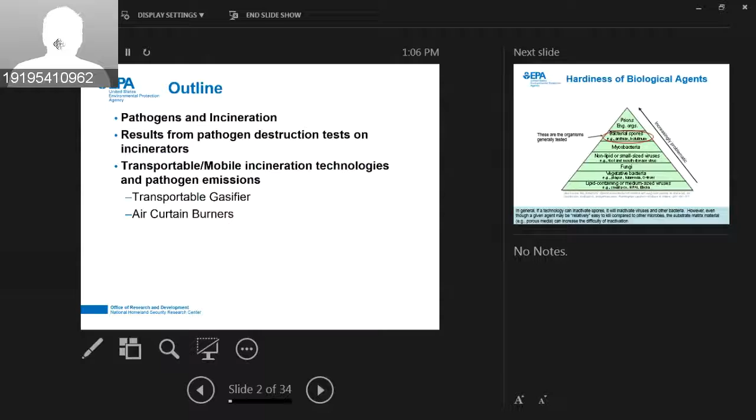All right, there we go. Does everybody see? Oh, actually, hold on a sec. All right. Does everybody see my screen now? I do not. I do. Don't? I do see it. Okay. You see it. Paul, you don't see it, though. I do not. Interesting. What do you see, Paul? Well, I'm trying to reconnect, see if that works. Sounds good. Okay, continue without camera. Okay, I see. Yeah, I see now PowerPoint with all the stuff on the side, and now I see the thing with multiple windows on it. Okay. So do you see just the single slide now, your title slide? Yes. Okay. All right. Good deal. All right. All yours, Paul, and just tell me when you want me to advance.

Okay. Well, I appreciate the opportunity to talk to everybody about this. I was asked to talk about issues related to emissions of pathogens from mobile and transportable incineration technologies. So you can go on the next slide. And so I'll talk a little bit about what we know about pathogens and incineration in general.

I'll talk about some of the testing that we've done at our research facilities looking at destruction of pathogens from incinerators. Talk about the various transportable or mobile incineration technologies that we have a little bit of experience with, and I'm sure there's a lot of other possibilities that you guys have probably had much more experience than me out in the field with. But we'll talk about the transportable gasifier and air curtain burners. And the issues that we see from these two sources are probably the same types of issues you're going to see from pretty much any other mobile thermal treatment type of technology. Next slide.

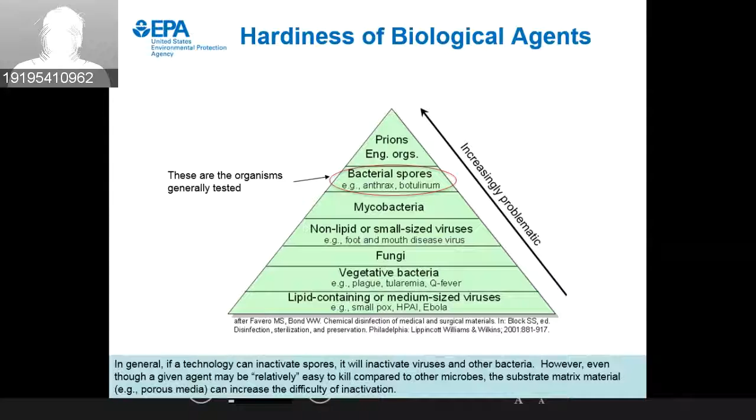So incineration essentially is high temperature combustion. Most of the fixed site incinerators and some of the transportable ones that you see will have a primary chamber and a secondary chamber. Usually the primary chamber is where the materials are fed into, and they may not operate at as high a temperature as the secondary chambers, but the primary chambers will effectively kill a lot of the microorganisms.

It'll release combustion products and particulate matter into the gas phase, and it generally generates the residual bottom ash that gets dumped out and recovered and brought to a landfill or some other type of disposal method. Then there's a secondary chamber, which is usually like a large box, and the gases pass through that.

Sometimes you have burners in there to apply additional heat, and they typically have to stay in the secondary chamber at a certain temperature, like 1,000 degrees C or 1,800 Fahrenheit, depending on how you look at it, for a couple seconds. And coming out of the secondary chamber, you'll have some fly ash.

You have acid gases. Sometimes you'll have organic material in the gas phase. Sometimes you'll have organic material bound onto the fly ash. Dioxins in particular are typically formed downstream of the secondary combustion chamber. So sometimes incinerators will have air pollution control devices to catch the particulate matter and acid gases and to prevent the formation of pollutants like dioxins and furans.

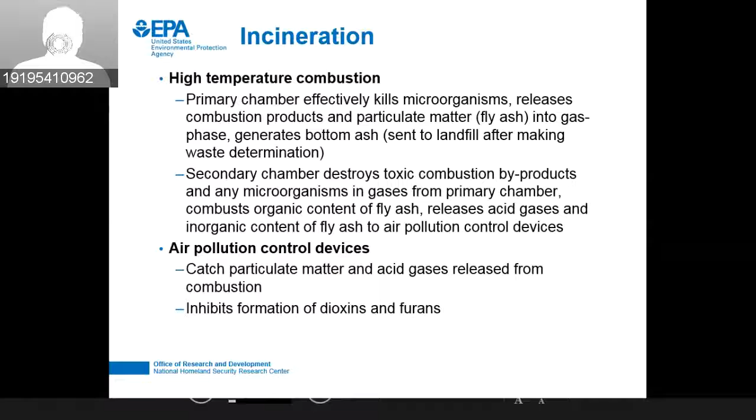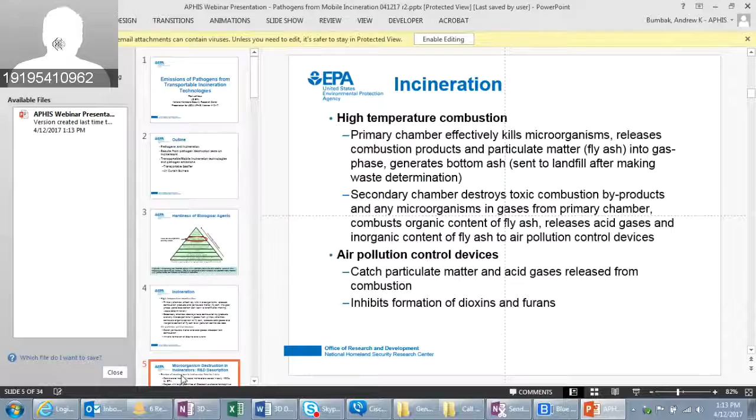I still just see the one slide. Oh, there we go. Oh, somebody's PowerPoint crashed. I hate it when that happens. Well, right. Sorry, I was muted. Are we on the right slide now? One before this, I think. Okay. Yeah, I think one more before that, maybe. Okay. No, you're right. It's the one after this. Sorry about that. Okay.

Well, there is not a lot of full-scale data out there on pathogens from incinerator systems, because in order to measure them coming out the back end and have it be so you're not just driven by your detection limits, you have to put a lot of your surrogate organism in the front end.

And back in the 90s, when the EPA was trying to figure out how to regulate medical waste incinerators, they did a series of tests on the field units that were out there, and they doped the waste with large quantities of Geobacillus stearothermophilus, which is a spore-forming bacteria that is commonly used for performance assessment of autoclaves.

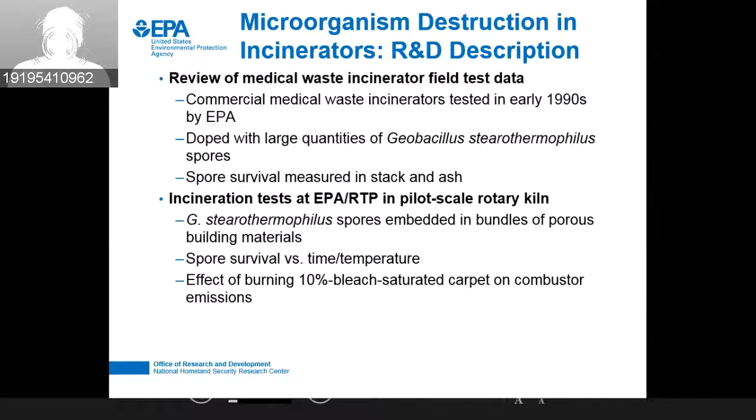We also wanted to look at the impact of some of the disinfectants that might be used and end up in the waste that you would process through the incinerators. And since bleach is a commonly used disinfectant, we wanted to see what impact the bleach would have on the combustor emissions. Next slide. And what we found on the medical waste data,

Yes, I'm still seeing the one slide.

We found that the test data from the medical waste incinerators is, in most cases, they achieve 6 log reduction for most of the facilities. But there was a handful of facilities, like 2 or 3 of them, where they achieved less than 3 log reduction. And when we looked at a statistical analysis of the operating conditions, we found that the primary chamber temperature and the secondary chamber residence time were the ones that were most statistically significant in determining the level of destruction that we saw. So we thought that was kind of interesting.

If you look at the graph that's up in the upper right corner of this slide, what we found from our spore destruction tests is that no matter how long you left the material in the incinerator, if you could make sure that the coldest part of the slug of material that's in there got to 350 degrees C, then we didn't see any spore survival.

So we thought that was kind of interesting in that the incinerator was operating at 1,000 C for some of the test conditions, and we were pulling live spores out after 35 minutes that were embedded in wetted ceiling tile. Because, again, it took 20 or 30 minutes for the water to boil off before you really started seeing the material come up to temperature.

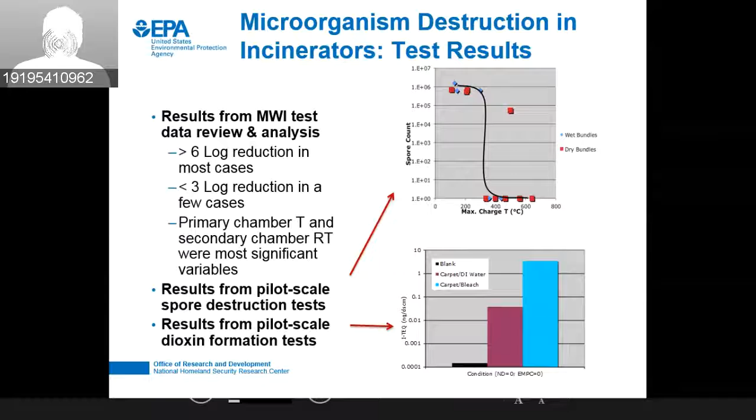So overall, what we found as implications of some of these tests is that if you can get the waste mass up to 350 C, you're going to kill all the microorganisms. For those that get into the gas phase, making sure that you achieve your primary chamber temperature and the residence time in the secondary chamber, that'll assure destruction. The ash is not likely to have any microorganisms, but there may be secondary requirements for disposal of the ash, like test for toxic metals or things like that.

When you're dealing with viral threat agents like foot and mouth disease, it's killed off at about 50 degrees C. And so the ash leaving the incinerator is almost always well above that. Usually they have to drop it into a water bath in order to drop the temperature down so that you don't damage your ash moving equipment that you use to put it into whatever roll-offs that you're going to use to send it off for disposal.

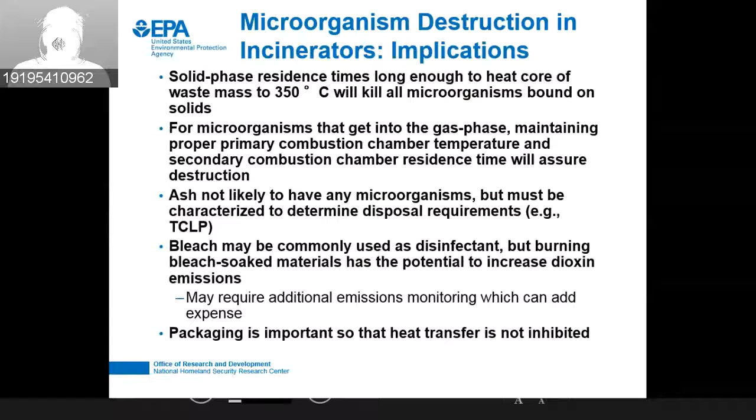And bleach is important. If you're going to use it as a disinfectant, it could potentially impact your emissions from your incineration processes. Next slide. So now talk a little bit about some of these transportable technologies. Lori and us have done some work over the years looking at gasification as a transportable technology.

For those who aren't familiar, gasification is a starved air combustion type of process where you have your primary chamber and you don't put enough air in to completely burn out the materials. So the gases that leave the primary chamber have enough heating value that they may potentially be able to self-sustain the combustion in the secondary chamber without having to add much fuel in order to maintain your temperatures. So because you aren't dumping a lot of air into your primary chamber, there's lower flue gas flow rates, and you might be able to get more throughput for a smaller size piece of equipment.

Because you aren't blowing a lot of air through the primary chamber, you don't entrain a lot of ash and solid particles out of the primary chamber, so you potentially could have lower uncontrolled emissions than conventional incinerators. Gasification works better in a steam environment, so having the high water content that's produced by processing animal carcasses may actually improve the efficiency. The unit that we tested didn't require any pollution control equipment. It ran on natural draft, so there weren't fans and scrubbers and things like that downstream. So it made it a much simpler design to send out into the field.

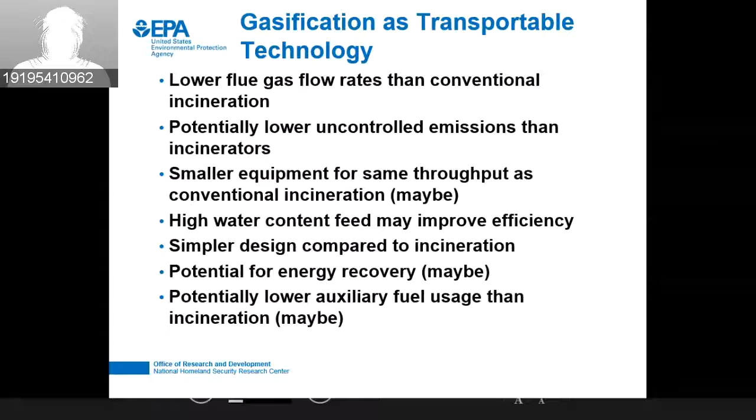But the general way the gasifier worked is that you would process your feed into small chunks, about ½ inch size, so it's about the size of the end of your thumb, and it would fall onto the bed, and drag chains would be moving down the bed, so the material would drive off the gases in the primary chamber, and then as it left the primary chamber, it would interact with the flames from a burner,

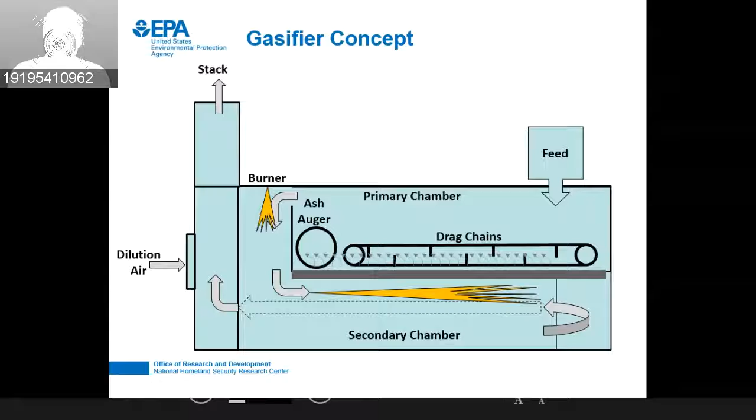and then go into the secondary chamber, and then make another 180-degree bend backwards and go up the stack after getting dilution air. So there wasn't any fan required for sucking the gases through the system. It was all done through natural draft. Next slide.

Now, a key element of this is that you can't take a whole animal and put it into a combustor and get very good performance, because you have a mass of dense cold material that has a lot of water in it. So for most of the mass mortality type of portable incinerators, you're going to have to be looking at some kind of feed size reduction concept. This is what we had for the gasifier.

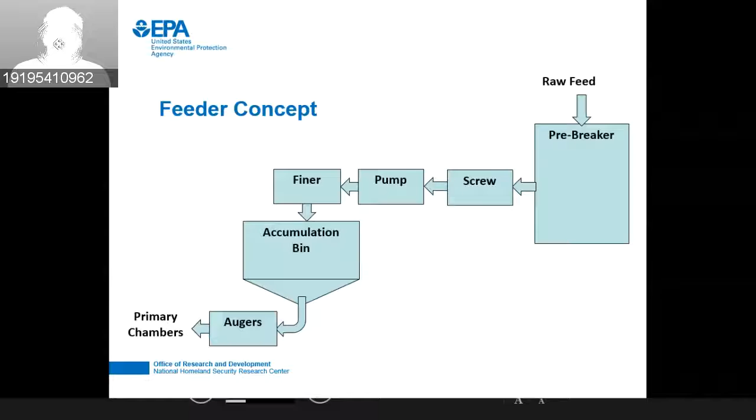There's variants on this that would work, but in general, you would do some kind of initial size reduction. We had a pre-breaker, and then moved it to a different process, which was a finer, in order to get it down to the small size, then it went into an accumulation bin and got augered into the gasifier. So whatever type of transportable technology you have, you might need some kind of size reduction technology like this. If you go to the next slide, I think we have a couple pictures.

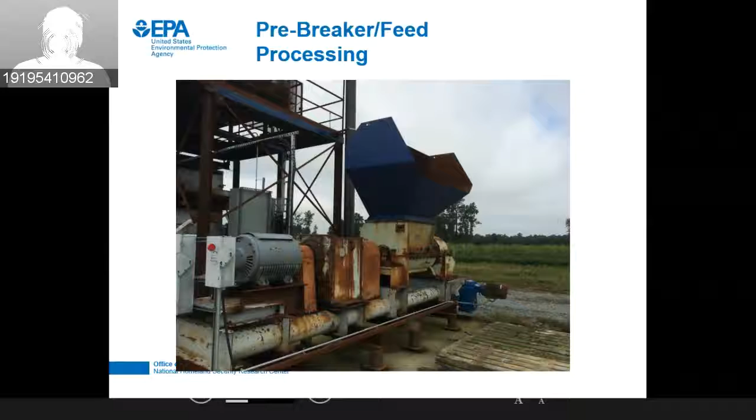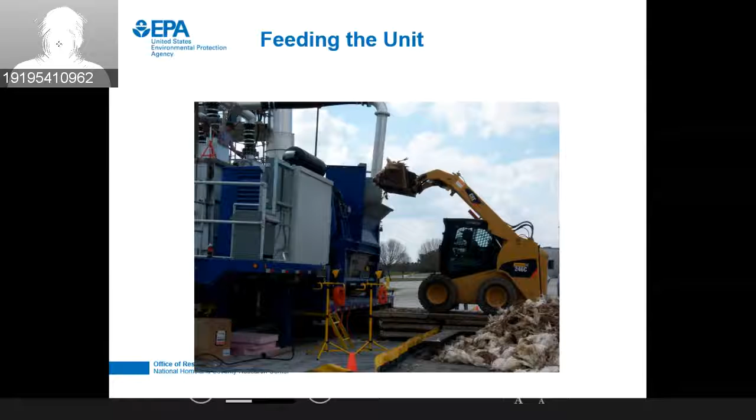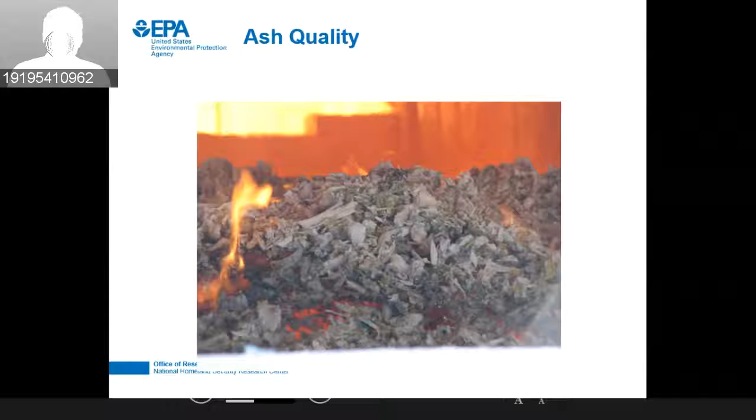So based on my experience and what we've seen in the field and in our pilot scale tests, emissions of pathogens from these types of systems in the stack and the ash is highly unlikely. Probably your processing of your feed materials is where the potential for pathogen release is. Also from runoff from the liquids due to the decomposition of the animals as they're staged for processing. The aerosolization due to the size reduction equipment, those seem to be the potential main sources of the pathogens escaping.

As far as countermeasures for this, one of the things we talked about but never tested was to install a shroud around the size reduction equipment that would run at negative pressure, and then have the shroud vented into the high temperature part of the system, so that any pathogens or aerosols generated due to the mechanical size reduction get sucked into the high temperature freeboard of the incinerator, and they undergo the same residence time that any of the pathogens driven off the burning carcasses would get. And obviously, catching the runoff of the liquids would be very important there. Next slide.

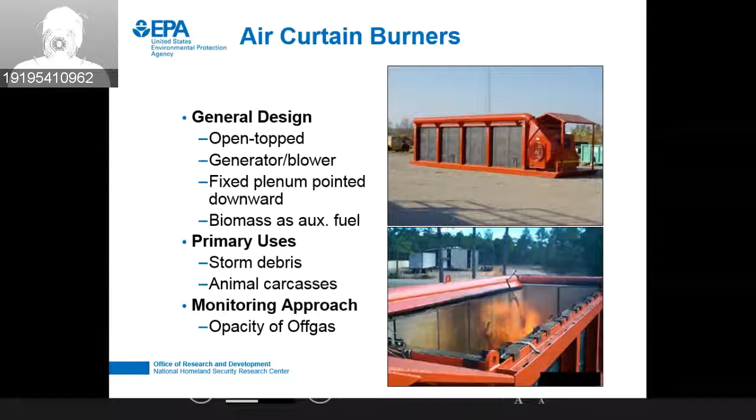So one of the things we wanted to look at was if you're using one of these units to process animal carcasses, we wanted to see at what point, as you increase the feed rate of the animal carcasses, do we start seeing pathogens breaking out of the system. And we couldn't do this on a full-scale unit because you need about 100 tons of trees a day and a lot of dead animals. So we built one that's about the size of one of those dorm room fridges.

And we had a company do fluid mechanics modeling so that we could achieve a similar fluid mechanics as the full-scale units as we could within the constraints. And based on our shakedown testing, it does mimic the emissions of the full-scale ones relatively well. We're within a factor of 2 or 3 of what you see from the full-scale unit. So we think it's a pretty good simulation. Next slide.

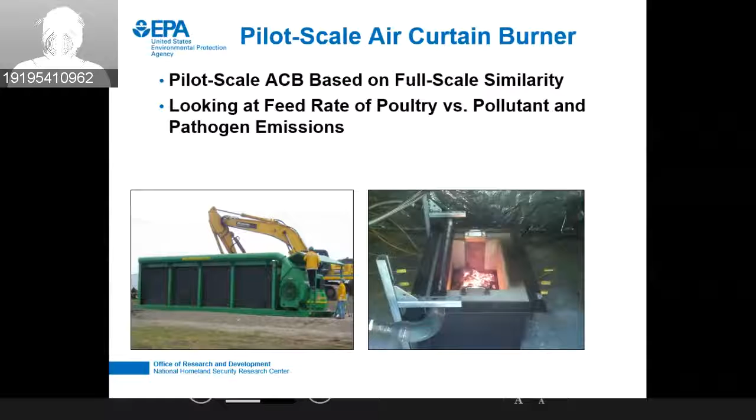So the question we wanted to ask is, if you're monitoring these air curtain burners for opacity, for example, and you start feeding it or operating it in such a way that the emissions start deteriorating, is that a conservative measure of whether or not you're going to start seeing pathogen destruction deteriorate? And so if you go to the next slide, there's kind of a graphical illustration of this.

What we want to do is increase the feed rate of the animal carcasses at a constant feed rate of the biomass. And once we hit the point where the emissions are unacceptably high, and you'll see when I show you the data from this unit, it's obvious at what point that occurs, we wanted to see if we're still achieving effective destruction of the pathogens.

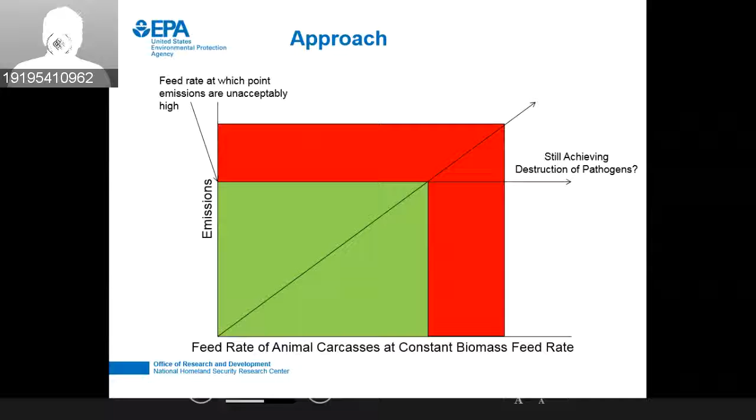Next slide. So again, we fell back on our old workhorse Geobacillus stearothermophilus, and we put it into Cornish game hens, because this is a pretty small unit, so they're a little smaller than chickens. We injected a large quantity of the spores into the body of the birds, fed them into the feed chute by gravity, and we used 2x2s as our biomass supplemental fuel.

We had thermocouples instrumented on various points in the unit, and we did this all inside our burn hut, so we can measure the amount of air that's going through the system, and we can back calculate all of our emissions data to the amount of material that was burned. And then we ran it all through a baghouse and a HEPA filter so that we weren't going to be emitting anything out the stack of concern. Even though the surrogate spores we were using are non-pathogenic, we still thought it best to try to capture everything we could. Next slide.

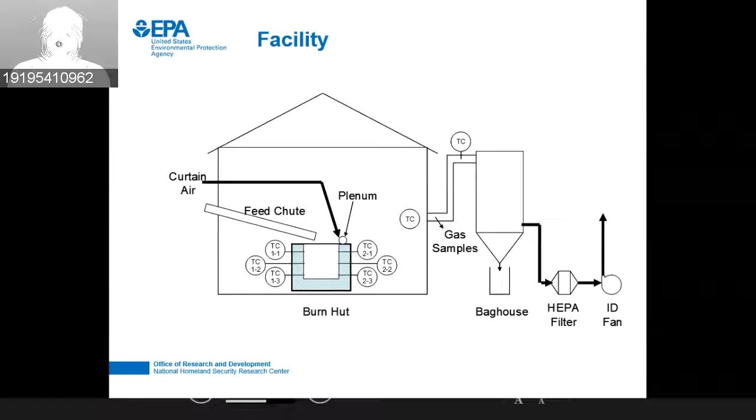So we targeted 25 pounds an hour of wood, and then we were using the whole Cornish game hens, and we fed them at varying intervals. So we fed them constantly, every 2 minutes, every 4 minutes, 6 minutes, 8 minutes, and 10 minutes. And each one was inoculated with 10 to the 6 spores of stearothermophilus in 10 mils of growth media. Next slide.

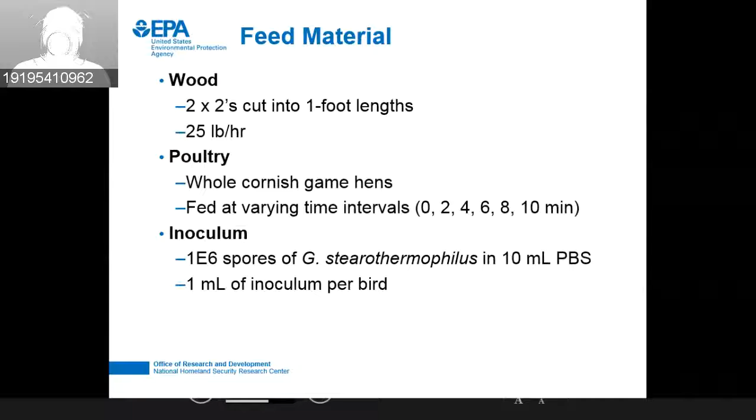So what we wanted to do is find a scoping test to identify the appropriate baseline conditions, and we ended up settling on the baseline conditions which are consistent with what was in the Kansas State carcass disposal report, which is a ratio of wood to birds of 2 to 1 on a mass basis, and it ends up being 1 bird every 10 minutes was our baseline. And then we gradually started feeding in more birds in a shorter amount of time until we started seeing things really go to hell, for lack of a better term. And then we backed off from that and did sampling.

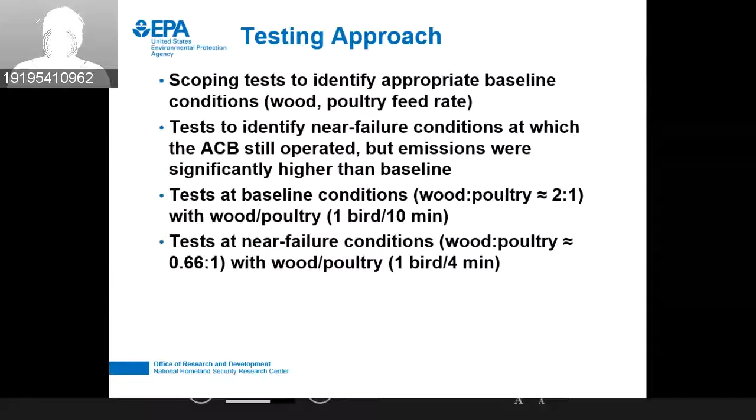So there were 2 conditions we did a lot of sampling at. One was at the baseline condition, and one was just prior to where the emissions really started going up. Next slide. So we measured the temperatures in the firebox. When it was all done, at the end of the day, we let it cool down, and the next morning we grabbed an ash sample and we grabbed the bone fragments from the birds out of the beds and analyzed them.

When these air curtain burners are operating, you end up with larger flyaway embers and things that are too big to really get entrained into the gas, so they kind of just drop out on the floor near the unit. So we took samples of the floor sweepings, we called it. We did wipe samples of the walls of the burn hut, and then, along with various gas analysis equipment, we used SKC biosamplers to get a gas phase spore concentration.

SKC biosamplers kind of look like a stack sampling device, but they use an oil-like media in them, and they have a special design of the fluid mechanics in order to make the gas sample impinge onto the oil in such a way that it forces whatever biologicals are in the gas phase to go into the oil, and then you analyze the oil. Next slide.

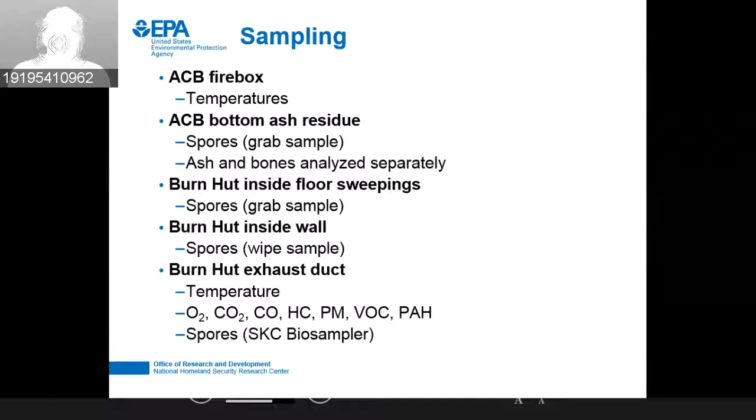Okay, so the way we did this is we'd start the gas monitors, wait for them to stabilize, start the wood, wait for it to stabilize, and then we'd start putting the poultry in, and then we would start doing the samples after we started feeding the poultry in. After we finished feeding the poultry, we left the wood in for another hour in order to simulate a real operational scenario where they may feed dead animals for a while, but at the end of the day, they want to bring the unit back to baseline operation before they stop feeding for the day. So that's what we tried to simulate.

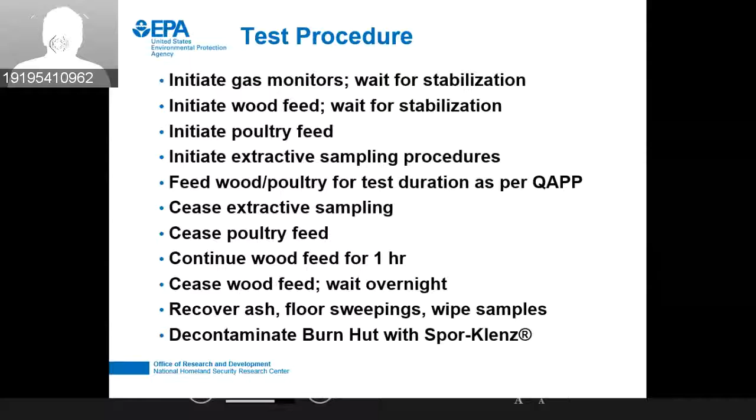And then we decontaminated the burn hut and the pilot scale air curtain burner the next day after we took our samples. And we used Spor-Klenz, which I believe is a peracetic acid and hydrogen peroxide mix. It's a sporicidal disinfectant. Next slide.

So this is an example of our feed rate. There's a couple outliers in the birds, because we're feeding them as best we could at intervals. But you can see in this test, we started at a low feed rate and gradually went up to a higher feed rate. If you go to the next slide,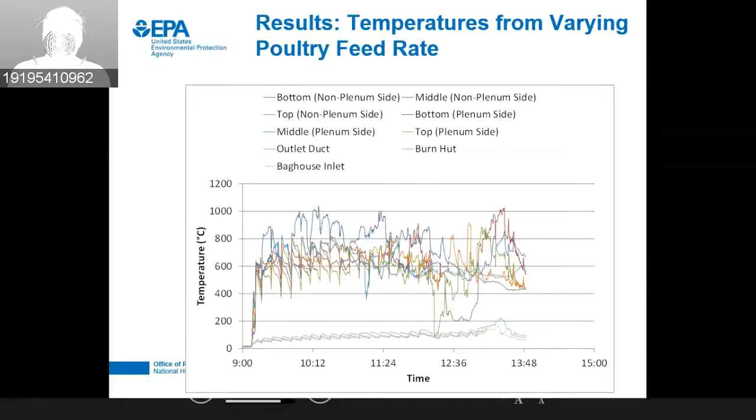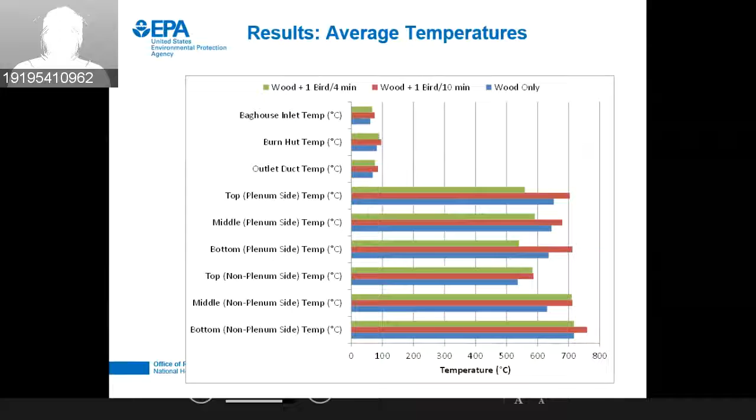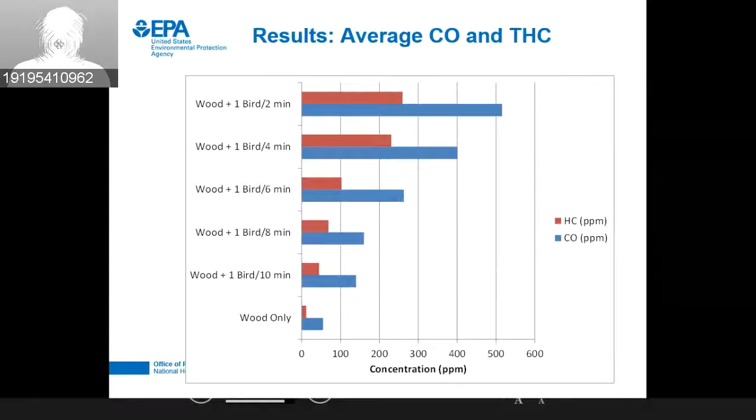So here's an example of the data on the temperatures, and these temperatures are relatively consistent with what you would see in a full-scale air curtain burner based on the testing that we've done and literature values. Next slide. Here's different feed rates of birds. You can see that as you increase the frequency of the poultry, the emissions go up significantly. This was hydrocarbons and carbon monoxide. Next slide.

And what we found was that even when we were operating on the ragged edge of making the whole unit flame out and quench, we did not find any viable spores in the air emissions at all. Viable spores were detected in the residual poultry bones in 1 out of the 8 tests. In the floor sweepings, we found some viable spores.

So these were the particles that essentially got lofted into the air from the unit, but they were too large to get entrained into the main gas flow, and they just kind of fell to the ground. And we didn't see any viable spores on any of the post-combustion wipe samples, and in the residual ash, we didn't see any viable spores. Next slide.

We did some positive and negative controls to make sure that we weren't just having artifacts associated with the facility itself. So we did one control where we injected the inoculum directly into the exhaust duct, and we got very good recovery. We did another control where we injected the inoculum directly into the freeboard of the burn hut, and we got very good recovery on that. We also did one where we injected the inoculum directly into the burn hut exhaust duct while the wood was being burned in the air curtain burner. And again, we got very good recovery.

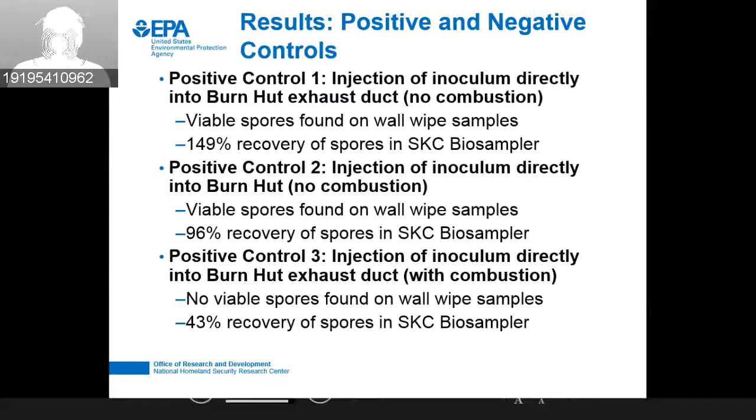So we are fairly confident that we were not destroying the spores while they went from the burn hut into our gas samples, and that we weren't losing them somewhere we didn't think we were. So we're relatively confident that the data we observed are valid as far as where the spores go and what's left over afterwards. Next slide.

So we did not see significant differences in the viable spore results at the test conditions where we had a relatively low feed rate of birds and a relatively high feed rate of birds. So within the limitations of the experiments, it looks like there were not any viable spores released from the combustion of inoculated poultry, even at feed rates that resulted in pollution emissions a factor of 5 higher than the baseline emissions. Next slide.

So as far as a bottom line, it looks like the transportable incineration technologies appear well able to control pathogen releases. The environmental monitoring necessary to maintain compliance appears to ensure little to no release of pathogens. The air emissions and the ash don't appear to be significant potential sources of the pathogens, provided the unit is operating correctly. It seems like the auxiliary equipment associated with implementing the transportable technologies is the main potential source of

the pathogen releases. So the handling of the animal carcasses, size reduction equipment is a big one for making aerosols, runoff of the liquids, and then decon of the system after use. You have to make sure that as you send it on its way to its next destination, there isn't any residual pathogens. Those appear to be where the main potential source of the releases are.